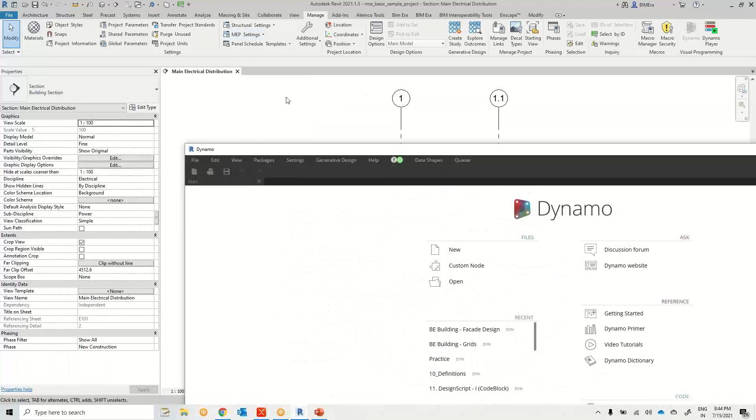Let's say for example you have an interference check in the collaborate tab - can you change this to the manage tab? This is what playing is, using is different, playing is different. You're going to play with the tool using a programming language. So this is a different interface, and this is another interface. This is like an add-in, a lightweight interface add-in, which is inside Dynamo, inside Revit, but it can completely control the application.

I'll explain how it's working, I'll scan it, and I'll simply let you work with them and explain what it would be. So Dynamo is a program, a way to tell Revit exactly what to do. It is saying, 'Mr. Revit, I'm Dynamo and I'm your boss. I can control anything, so you have to do as I instruct here.' That's what it's saying. But how do they communicate?

How do they communicate? For example, if you are in Spain, and you want to communicate with Spanish people but you don't know Spanish, how do you communicate with them? You need a translator. If they want to communicate with you and they don't know English, or Hindi, or Tamil, how do they communicate with you? Again, you need a translator. Well, Dynamo is acting like a translator between two different sets of things. What are these two? I'll explain later.

So visual programming is not new to the industry - it's been around for so long. If I show you, generally we teach kids for free of cost, like what Byju's is doing, like what some other companies are already doing. We teach kids in a batch, two to three very small kids, like fourth standard, fifth standard. We teach them with a very basic thing, like this kind of tool, where there are more similarities between this tool and our Dynamo as well. What is that?

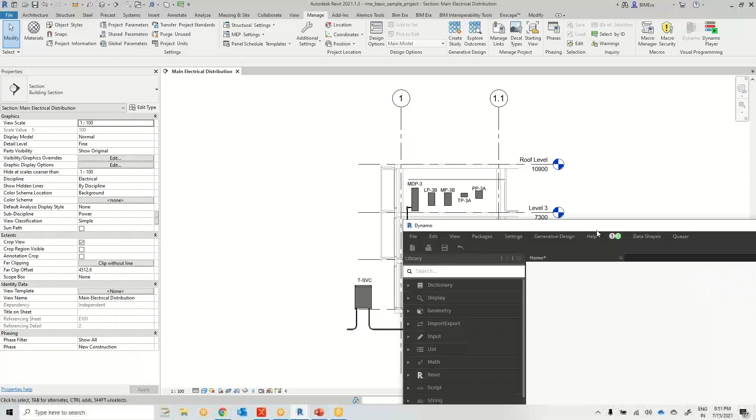Let's say, which model have I just opened? So I'll go with - okay, let's go with this. So electrical equipment - this is an electrical equipment. Let's say I can choose what categories we have here. Categories, in the sense, nothing but the part here. Whenever you select an object, if it's showing something, it's like a category.

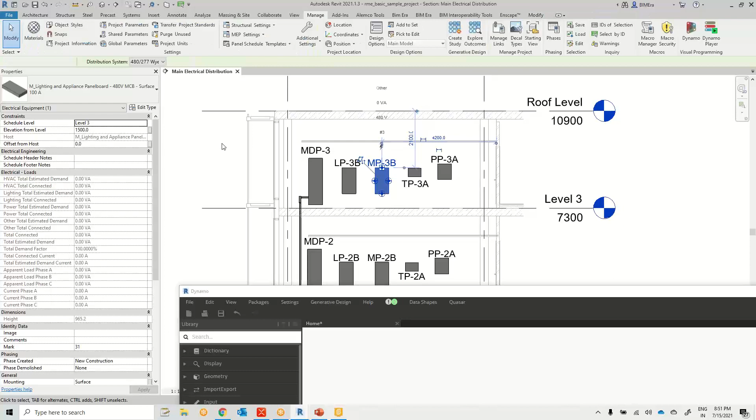So category, when I connect, all elements of a category, I want to get all elements of the particular category. He's going to give us an input as a category.

So I'm connecting this to this. When I connect the node, it is in a hidden line, so it's looking for its active parent. There's a logic behind this, you'll know later. What is the parent and what is a child?

It's mostly a common term for programmers, we also use parent and child. So here category is going to be the parent and this is going to be the child. Whatever the first part is the parent, the second part is the child. Now I want to know who is the father of this child. This is how we can question something with a different sentence.

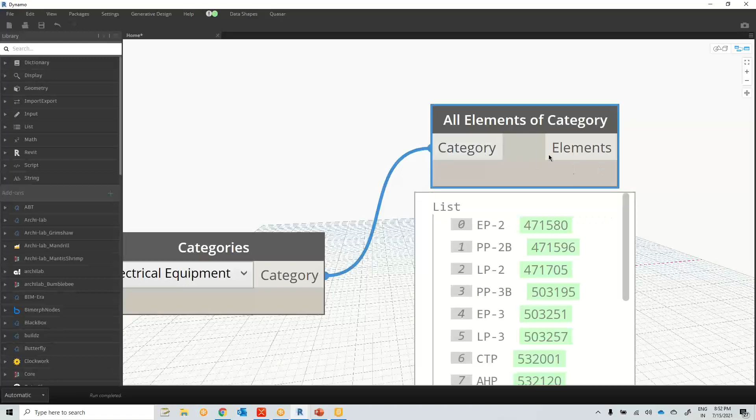When I connect the categories to the category, I can see 29 elements. I got this 29 elements, that is fine. I have a connection.

So when it comes to programming, we have visual programming and we have two kinds of things. One is block based programming, and this is an example of block based programming, and there are a lot of block based programmings.

Trust me, you are not directly entering into programming. You can't pass an SSC without clearing fifth standard, sixth standard. There are certain things you have to master first. Before getting into programming, don't directly play with the programs.

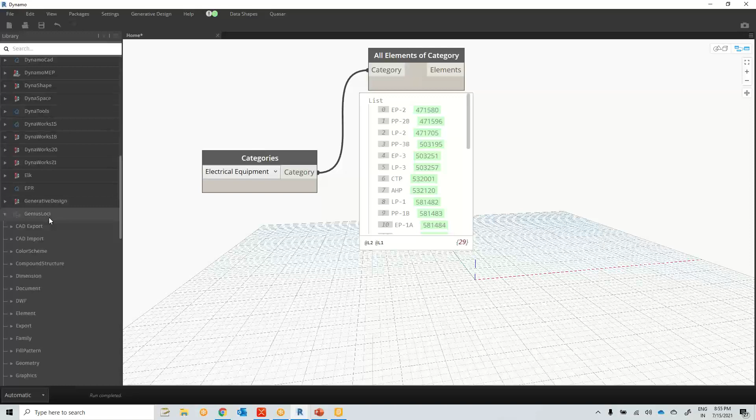When I click on Genius Loci and CAD export, this works in an extreme way. It does a complete automation within, it has some things written itself. When I double click on this, there is Python code again, where somebody has already created a script here, and I should know how to use it.

If you know how to use it, you can play with it. The only thing you have to know is visualizing. That is what we call visual programming.

You're not writing any kind of script here in my course. In this zero to hero module, you are going to learn 80% of Dynamo, and 20% of a concept like design scripting. Design scripting is a different language—not like C, not like C++, not like C sharp, not Python.

That's a different language. It's a combination of some sort of designing and some sort of scripting, so that's why we call it design scripting. That's recently added, from the last 3-4 batches I'm doing it. Most students keep asking, sir, I need this topic, and I can't take personal sessions for everyone. So I decided to add design scripting into it. I'll show you what I'm going to teach you in the entire training program.

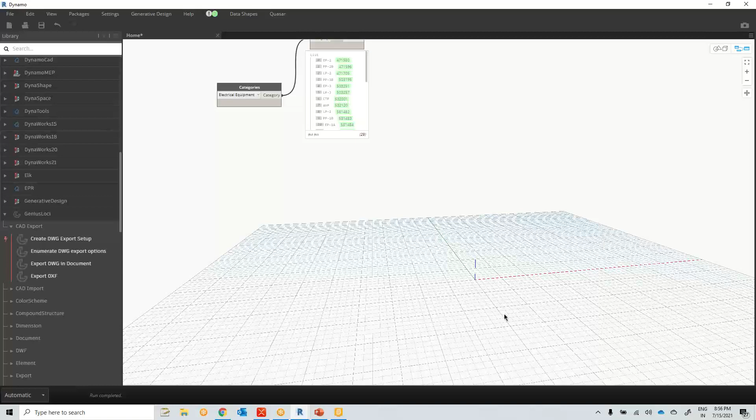So this is block based programming, and we have one more thing, that is flow based programming. What it does is there is data passing from one block to another. So this is a block which consists of A to Z alphabets, and I have some FACP panels, or I have some structural columns. So I have to name each and every structural column as per the grid locations.

Where there is a grid intersection, at that point I have to place one column up to a certain height, and I want to tag it instantly, name it instantly. So this is my intention. So I have data of structural columns, and data of something else, like A1, A2, B1, B2, C1, C3. So this is the data flowing from one to another, and some sort of functionality is happening inside a block.

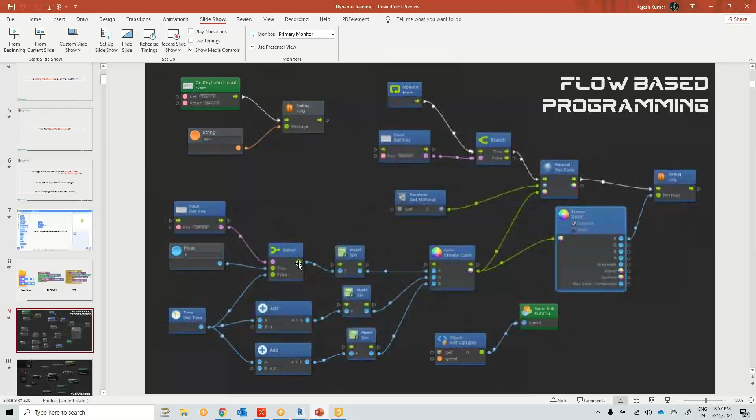So this is a block and somebody has already written some sort of code inside it. Generally we call these code blocks, or nodes. A code block is different, you can write something in it, but still we can call these nodes or code blocks. I don't want to give you the complete introduction, because I can explain these 10 slides for 1.5 hours with very detailed explanations. You don't need to do any R&D even.

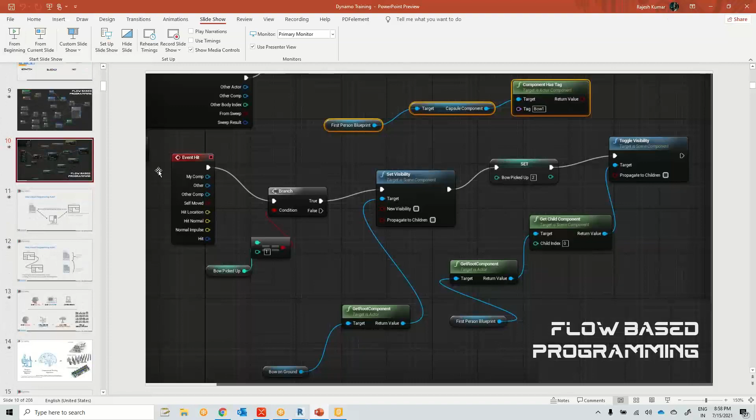We have a lot of visual programming tools in the market, and this is going to be a boom in future. Because if you are from a mechanical, electrical or architectural background, architects and structural persons can easily understand the programming parts, because they keep playing with points, vectors and scalars. So this is how it would be. Well, let's get into the topic. Let me show you.

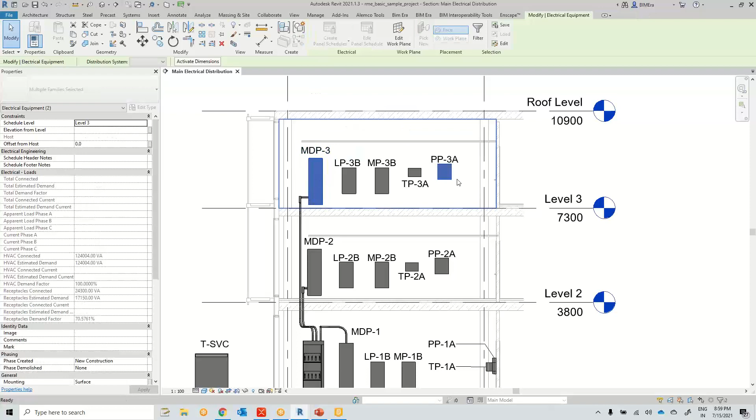So this is Categories and All Elements of Category. Now you can ask me, why did you connect Categories to All Elements of Category? Are you sure I have 29 electrical equipments? Let's select this, click on BX, and the 3D opens, and let's say VG. Turn off all the things except electrical equipment. Click OK, and turn off the section box.

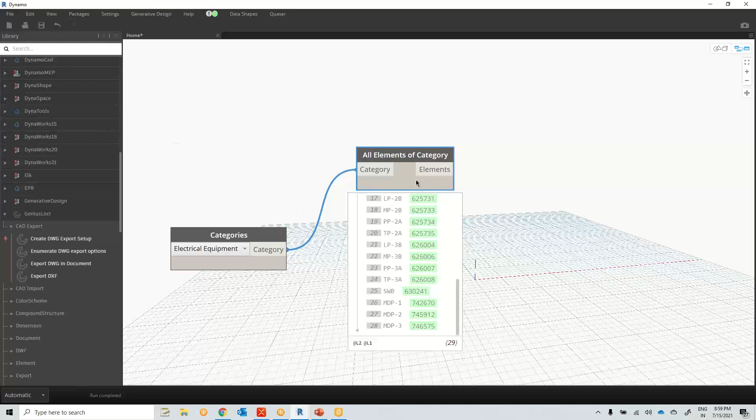When I select all this, it is showing 29 elements. Then it's perfect. I got the 29 elements. Well, this is fine. So how does it know exactly? Do you have any logic behind this? So for example, All Elements at Level.

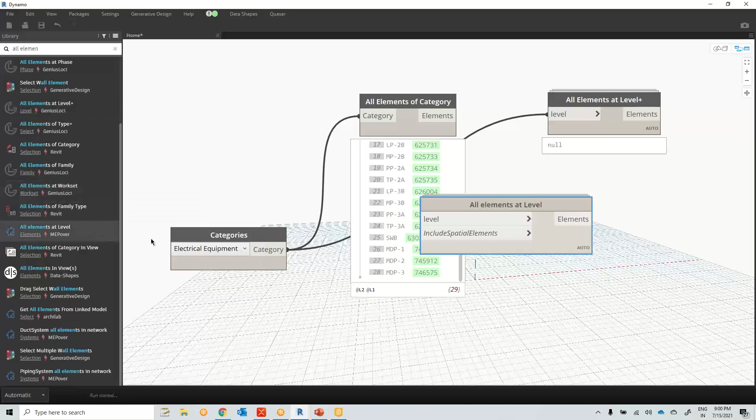I have an electrical equipment category, and I want to see this particular category at a particular level. So when I connect this to this, it is not returning anything. Let me try All Elements at Level. Why is it not working? It is returning an empty list. So All Elements of Category in View, Get All Elements, Select Multiple, All Elements at Level.

When I connect this to this, why are all these not working? Because of logic. The only thing is logic. That's what I'm going to teach you: what you have to exactly do with it, why this is working successfully, and why the rest of them are not working. Let's do some sort of an anatomy. You know what an anatomy is?

I mean, like doing some sort of a surgery and see what is inside a person, see what is inside a frog, see what is inside an insect, see what is inside any kind of living being. Okay, so generally I like to repair things, like if I buy a new toy or a new gadget, I don't sleep until I repair it. So well, we'll do the same thing here.

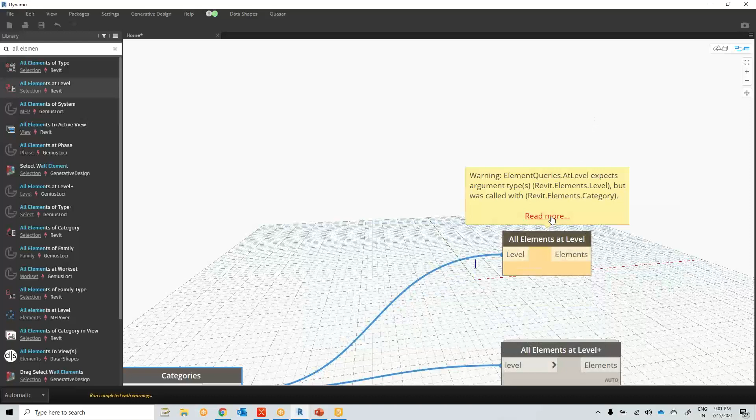Okay, I found some sort of nodes here. So which is the correct node to connect to the connecting node? So I have this, and why should I connect this, and why is it giving you a warning? Let's read the errors. Okay, what is it saying: ElementQueries.AtLevel. Okay, that's a node name that is expecting a level, but you have connected a category. Oh, that is the reason. If you understand the warnings, you can play with any kind of node.

Okay, there is a complete session for errors itself. Because guys, if you really want to understand something, you have to play with troubleshooting. You have to create your own problems, and you have to find the solutions for them. Only then is that called pure R&D, perfect R&D. That's what I did. There were a number of times I've been scolded by my team for disturbing something, but I like it. If somebody's scolding me, I really enjoy it, because that's a challenge to solve something. And I used to come back within 1 hour, 2 hours or a day with a proper solution and say I cleared my problem.

But still, I'm not telling you to do the same on your live models. Just open it in detached mode and play with it. When you're playing in detached mode, it works fine. When you're playing in live mode, of course it can disturb something completely, and it's very hard to even rectify it. But still, the best thing: keep repairing, keep doing some R&D. That's what you guys have to do.

Okay, and you don't need to do that kind of thing. I'm here to teach my 4.5 years of R&D experience in 15 to 20 days. It's very hard to explain, but still I'll try. There are a lot of things. There are around 208 slides, and there is design scripting, one more presentation of around 75 slides. So in total 300 slides, which are very well designed. And I'm going to give you the complete brief on how you create your own custom nodes and how you publish your nodes under your name. So this is up to you to learn.

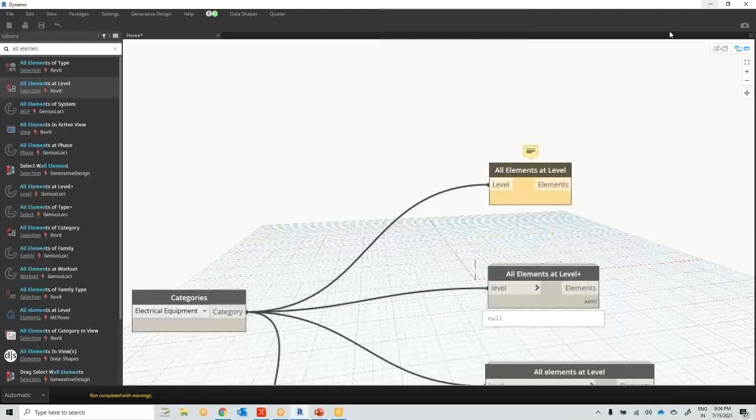Okay, so All Elements at Level, why isn't this working? Let's cut this, and this, and this. Okay, now I just cut each and every node, and now for every node I have two paths. One is before and one is next. The before, the left hand side part, we call the input, and the right hand side part we call the output. Okay, so input and output. The input has to connect from the existing node. There is a logic behind it.

Now let's consider this an input and output. This is an input and output. Assume that is an input and output. Okay, I'm not focusing on the graphics now. I have a very bad mouse.

Okay, well, the first logic that you are going to play with is that the output always matches with an input. If you're going to connect a connecting node, generally we call them connecting nodes, if you want to connect a node with another node, the output of the first node should exactly match the input of the second node. So output and input, output and input. The output is a category and the input is a level. Are those matching? Guys, please unmute your mics and say, are those matching? Output and input?

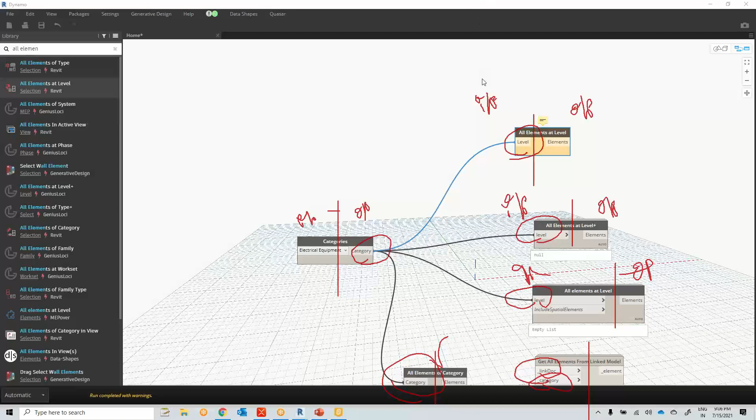Okay, well, the same logic applies here. So output and input must match. This is the first tip that you have to remember. Okay, well, let me clear all the drawings again. Well, all elements at level.

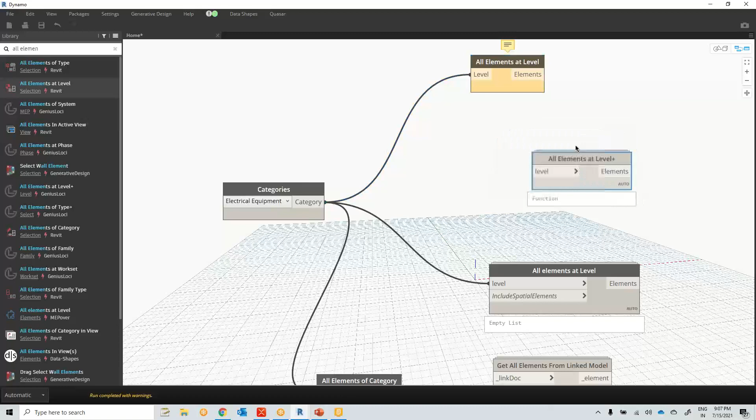Okay, if you know a node, it's very easy to find a connecting node based on the first logic. What about in the reverse case? In the reverse engineering method, you know all elements are at level. You have a node which is all elements at level, so you visualize yourself: if I connect a level, it will connect all the elements from that particular level. What would be the connecting node of it? Then you have to start finding from the input.

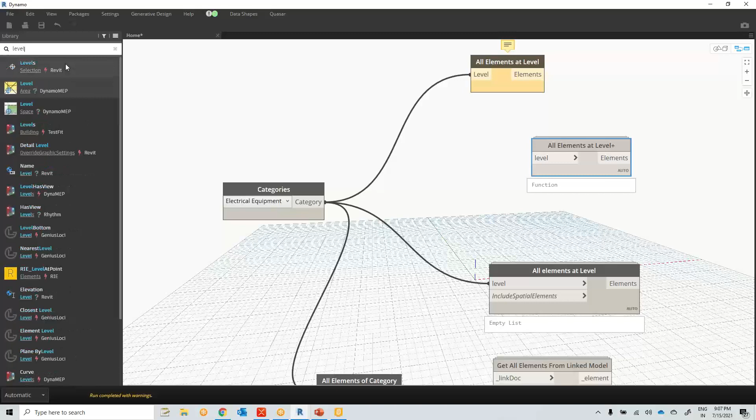What is the input name? So if it is saying level, let's type level. I'll see levels. Level dot area. This is also giving you the level dot space. This is a space, so keep this aside for now. Levels building, there are no levels. Name level, it is a different thing again. So I found a few things. I can't explain all those things in this demo.

So what is a level here? For example, if I choose level 1 here and connect this to this, it's giving like 4065 elements in level 1. If I go and change this to level 2, it's showing 2456 elements in level 2. There are zones, model curves, spaces, some sort of 600 by 600, 400 by 450, whatever it is.

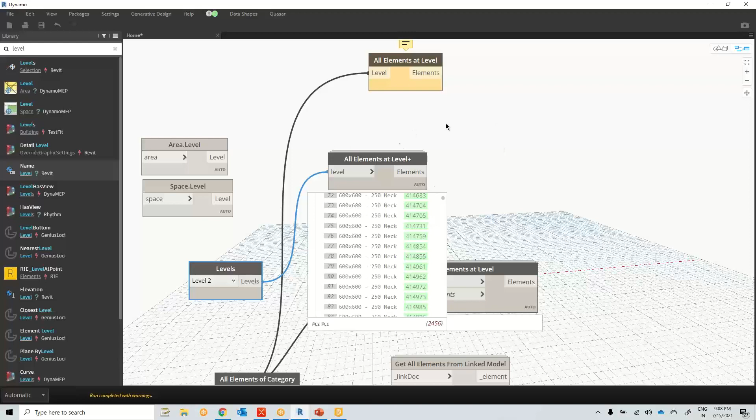Now I want to know what these elements actually are. I successfully connected this and got a node. Now I want to know the connecting node of this. I want to know the name of each and every level, I'm sorry, each and every element. How do you do that? How do you find it exactly?

Okay, well, this is for you only. I have an element with me. There is a technique to call any set of a node. What is in your hand right now? Put a dot, and what are you expecting to see?

Let me change this, select this fixed width. Let's change this to 500. Okay, well, so what is in your hand and what are you expecting to see? Well, what is in my hand?

I have an element with me and I want to see the name of it, and I want to see the ID of it. I want to see the location of it. I want to know what type of an element it is, and I want to see what is the category of it. Okay, now the third thing is, let's keep this set. Element. What is in your hand? It's an element.

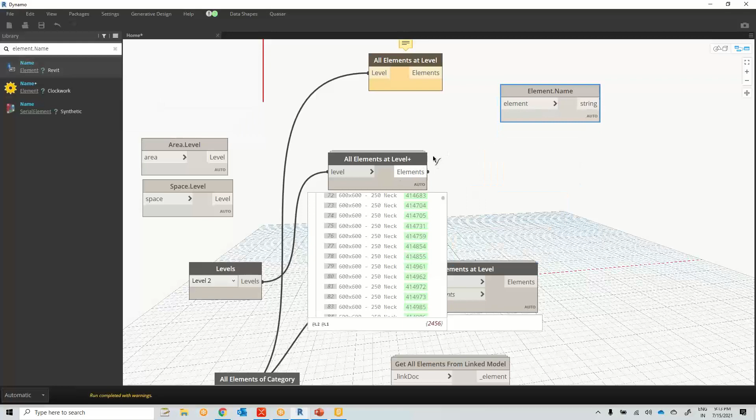Okay, so element dot name. I want to get the name of it. Element dot name. I got this element dot name and I connect this to this. Successfully I got it. Let me delete these 2 nodes aside. Element dot name. I got the names of these elements.

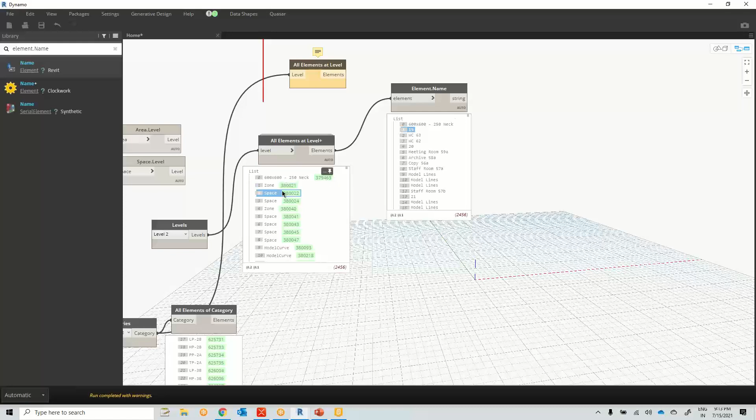So it's 600 into 600, 250 neck, 19. What is this 19? It's a zone name. It's 19, and a space name like WC63. WC means water closet, 63, and space name is like WC62, and zone is like 20. This is how the name is.

Now I want to get the category of it, what category it actually is. So let's say element dot category. Can I get a category here? Category plus. Why did I take this very easily? Because I know those two. Because if I use this, it's expecting an element, and when I connect the element to this, it will give you a warning.

I know this very familiarly because I've been playing with it for 4.5 years, so I know which it should be. I can't show you all those things at the same time. You'll come to know from the 3rd or 4th day itself, you'll be telling me, no sir, you shouldn't use that. You'll come to know with 8 to 10 hours of training for sure.

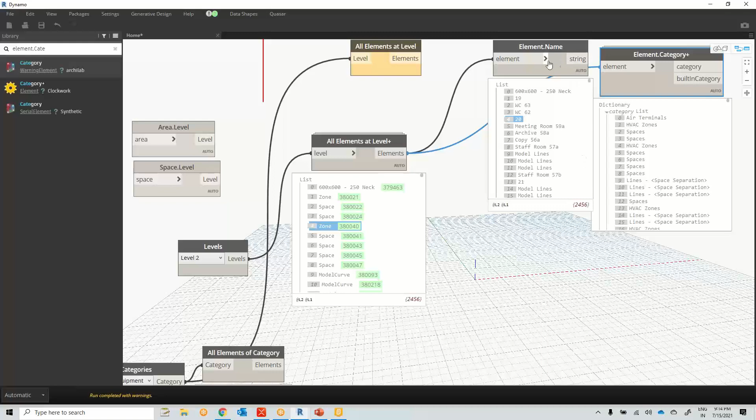So when I connect this to this, it is giving how many items I have? 2456. So I have 2456, and if I use a watch node here and connect the category to it, it is saying 2456. Let's bring this aside. I'll use this too, so I'll keep this aside. Now let me list it, perfect.

Now this one is an air terminal, the second one is an HVAC zone, the third one is a space, the fourth one is a space, the fifth one is spaces again. All these are spaces, and these are lines. If you go to the last one, 2451, it's model lines. So this is how you can easily find the category of it.

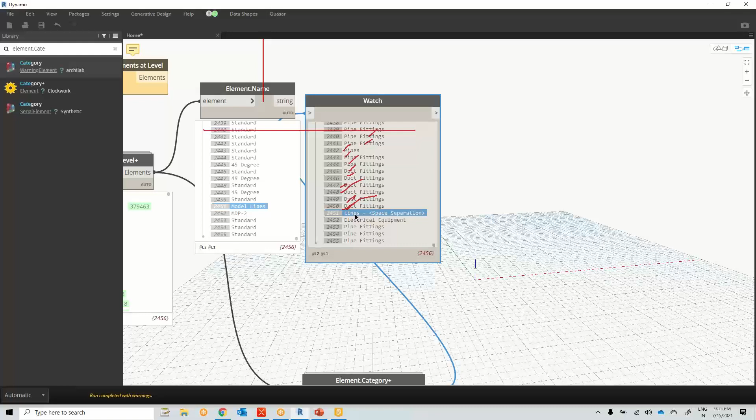Okay, now this is how it actually works. You have two different outputs. You could have a number of outputs. You could have a number of inputs even. So based on the number of inputs, you've been playing with different methods. Okay, so this is element dot category.

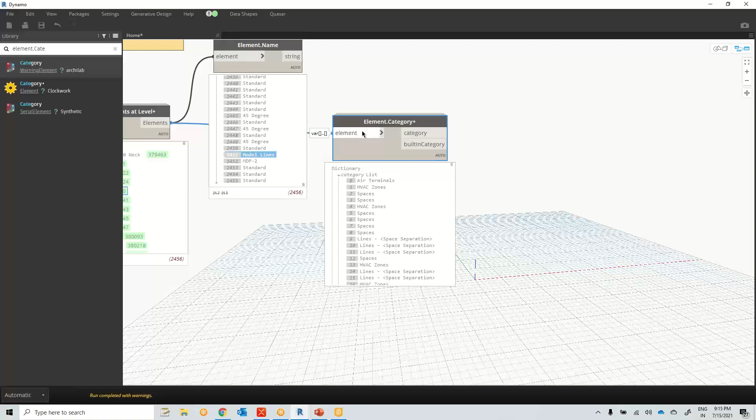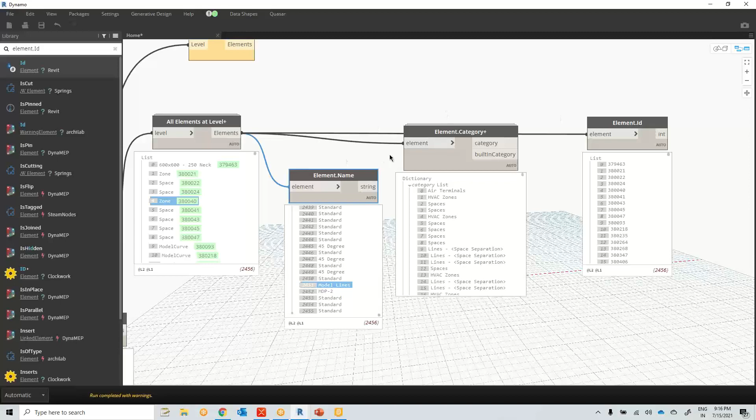If I want to get element.id for each of these elements, when I connect these elements, if you understand the basic logic here, for all these three nodes the inputs are elements. Okay, let's go with another way. I want to know the parameters of these elements.

I want to know the parameters of elements. We have 2456 elements. I don't want to play with all of them, I want to play with only the first element, because it'll take a long time to load it. So let's just get the first one.

It could be anything, even if I type bimera that's fine. Let's say bimera. When I open this and want to get the zero value, what is the element inside the zero value? So I'll type 0 and close it. Now when I connect this to this, it will get the zero value.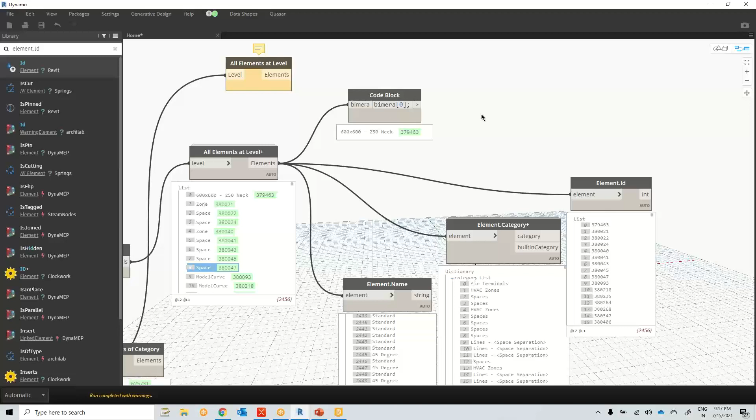Now if I say to go and get the eighth one, so when I type 8 here, it will be getting the eighth element, 380047. You understand? This is called design scripting. You will be knowing it later. We call this an indexing method from programming terminology.

Now I have an element here. How do you know that is an element? Here you can easily say that's an element because it is written over there, but sometimes nothing is written. It's like an element, how do you come to know that?

Well, there is a very friendly node, it's like Object.Type. When I connect this to this, it is saying that's a family instance and it's an element. You'll be coming to know the data types by the second day itself.

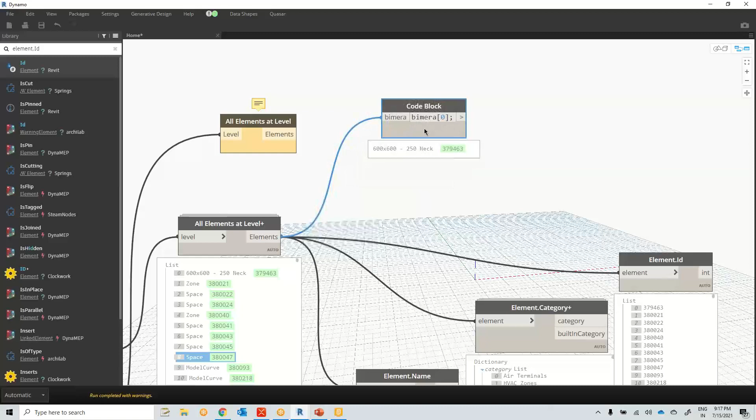So this is the first one, element, and I want to get the parameters of it. Now element.parameters, when I connect this, 34 parameters I have for this, and the categories are air terminals. What are these 34 parameters?

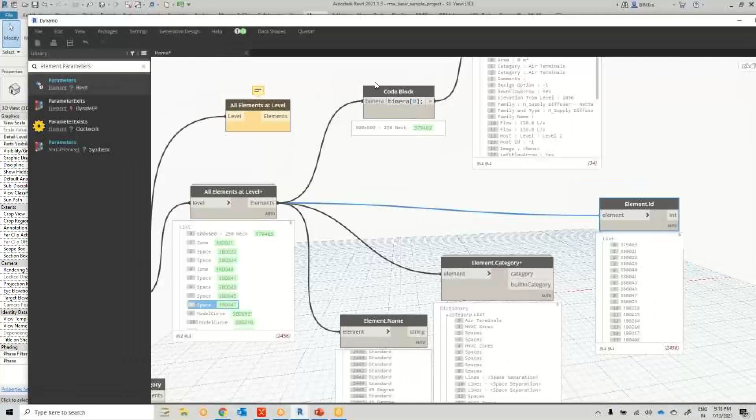Well, there is a logic. Where how can I get element.id where we don't have any parameter called id here? We don't have any parameter called id, but how can I get the id parameter here? There are a lot actually. Let's play with element.id where I don't have any element.id parameter here even. But how can I get that easily?

Okay, this is the properties palette what we see in Revit. It's nothing but even 10% of the actual parameters we have in Revit. There are a lot, there are a lot.

Let's say when you export a model into IFC, you can see different parameters, you can see a different set of parameters. One second, guys. You can see a different set of parameters. When you export this model into FBX,

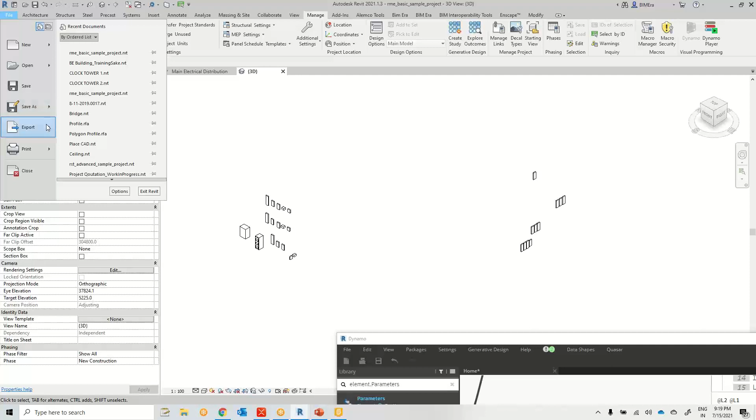you see a different set of parameters. When you export this into DWF or DWFX, you will see different kinds of parameters again. Well, GBXML, you can see a different kind of parameters, there are a lot. ODBC database - what is this ODBC database? You'll get everything. So there are different sets of parameters, but where are they hidden? Is there any specific tool here?

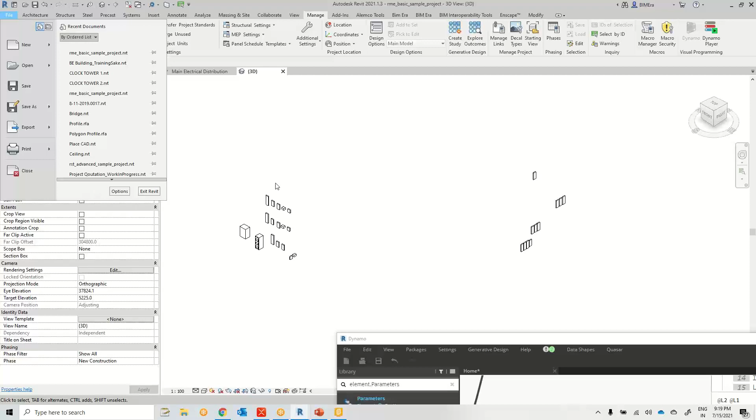Yes, that's called a tool, let me show you. For example, let's go and select any one of the elements here, where there's a tool called Revit Lookup. You can see from where we are extracting this ID information - there is an element ID, element.id, there is a name, element.name, there are parameters, element.parameters, and element.pinned, whether I would like to check whether an element is pinned.

Now Dynamo is reading the parameters from a different set of tools, where if you count these parameters, it would be like 34, and if you count these, it would be like 304, sometimes more. For example, when I click on the parameters again, we can see only one value which is inside a parameter, like total connected, the value which is 151984.66, where you can see only one value, but the rest of the 99% of values, what is this total connected?

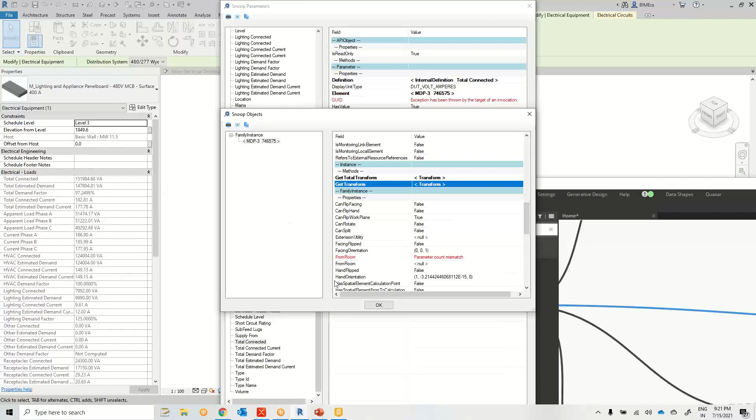Where is the total connected? PQRST. Okay, total connected, where we can see only this value, 151985, but rest of the parameters we have, and within that parameter again we have some set of parameters, and again within that we have some set of parameters, where one value is out of the entire thing, and the rest of the elements you can't see until unless you become a programmer.

Until unless you become a programmer. That's why we are going to explore everything in our training program.

Okay, so this is not rocket science, guys. It's very easy. There are some set of files. I'll just open the recent Dynamo training curriculum. If you see the document which I've already shared you, okay, that is this. These are the 10 key concepts. If you master these 10 key concepts, you can play with any kind of tool.

If you're a Civil 3D person, or a structural person using Robot Structural Analysis, you can apply the same concepts, the same methodology, the same terminology in all the visual programming applications. Even if you're an architect, if you want to play with Grasshopper, you can apply the same methodology. I even added some sort of Grasshopper things here. So the skeleton is different, the interface is different, but the common logic and concepts are almost similar in all visual programming.

Where you don't have design scripting in Grasshopper, you have design scripting here. That's it, nothing else. Where you use Python, we use Python here. Where there's IronPython, we also use IronPython here. The only difference is that's Rhino and this is Revit, nothing else. Where there's Civil 3D and where there's Revit here. That's it. If you learn this Dynamo...

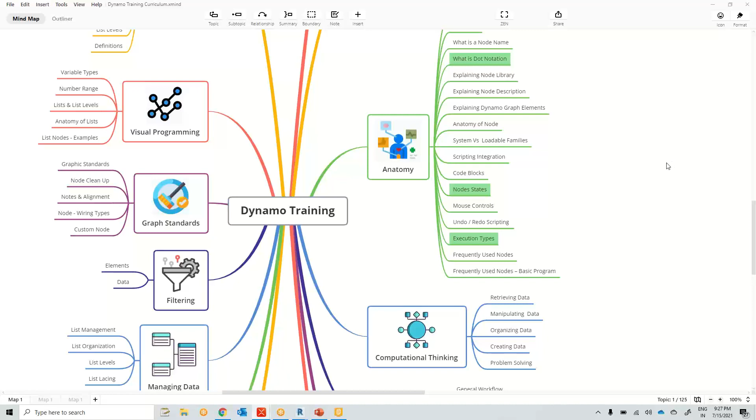Okay, where there is, you can't fit any additional thread into this needle. This is how the computational thinking, the user interface works, and you'll be getting an Autodesk authorized certificate. It's not from Autodesk directly, because even Autodesk isn't providing certificates for Dynamo, so we give you an Autodesk authorized training center certificate. Once they release a Dynamo certificate, I'll be very happy to provide you certificates from Autodesk, even if it's worth bearing the cost, I'll provide it for sure.

That's my promise. Second thing is, if you don't have time to practice, you can join any other batch after 6 months or after 1 year without paying again. This is an added advantage for you, and you'll be getting recorded sessions if you miss a class. You can join 15 minutes before, and I'll explain where you missed the logic or if you haven't understood something, I'll be very flexible in teaching.

Our training program will start at 8:30 daily, Indian timing. If you join at 8:15, I'll be there in the meeting room. You can come and join, and ask whatever you want. This is how it would be.

Well, graph standards and filtering. What do you mean by filtering? For example, if you have 10,000 elements, how do you play with only some set, like 10 elements or just 2 elements? How do you find exactly the elements which are not hosted? How do you rotate all the elements as one thing? How do you create a bridge within a couple of seconds?

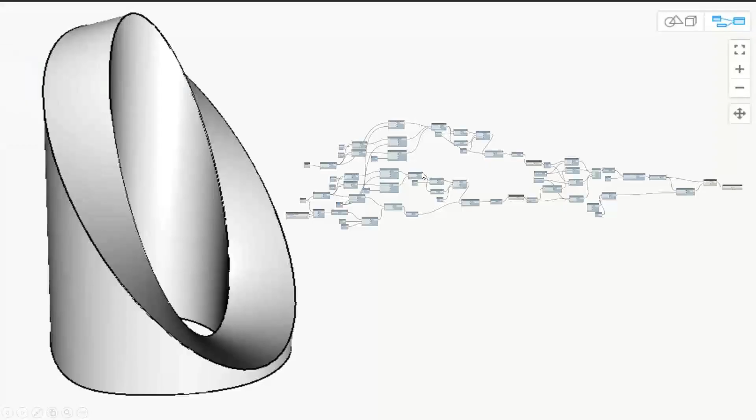Dynamo geometry. Oh, this is not the one. Okay, well, that's fine. So you can create these kinds of structures with the help of Dynamo. Your team can design these kinds of structures, and the base of this is the concepts. For MEP, they don't play with geometry, so they don't need this. But when it comes to architecture and structure, you guys keep playing with geometry things, so you must know all this stuff.

Okay, like how do you exactly turn this entire thing?

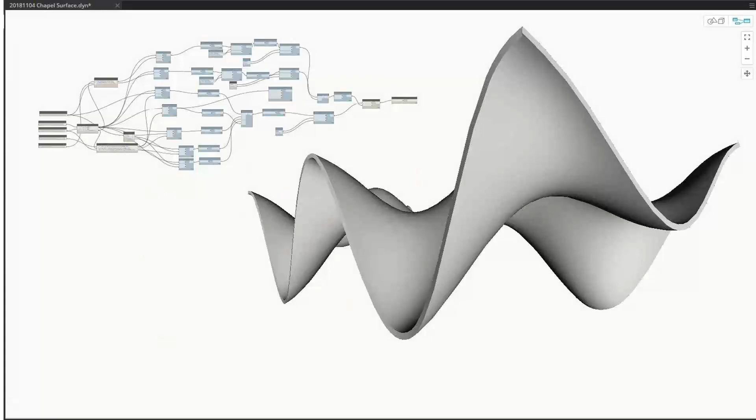How do you create these kind of complex geometries like tunnels or complex buildings, everything like these kind of structures, in like 30 minutes or 45 minutes mostly?

There is a very basic structure to understand. For everything, there is a logic. If you understand the logic, you can play with it. If you don't understand the logic, you can't play. That's the thing.

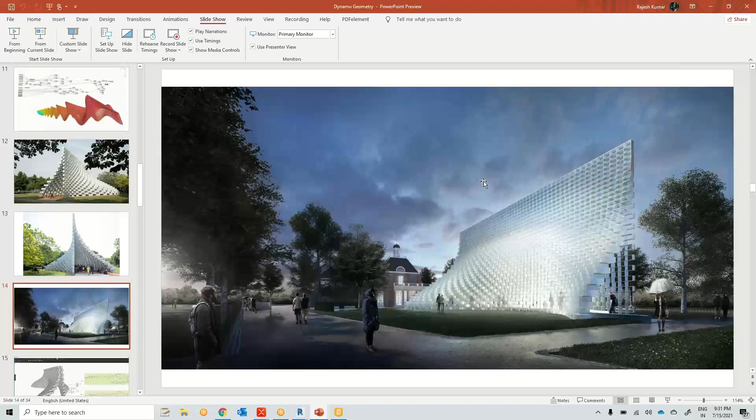When it comes to this course, I have designed like 200 slides for the Dynamo geometry as well. We cannot cover all the topics because most candidates I'm getting are MEP candidates. So I'll be focusing on MEP, architecture and structural, on these 10 key concepts. For MEP candidates, you're not going to play with any Dynamo geometry, so you don't need to bother about it. If you want to be a master in architecture also, you have to do the architecture programming course as well.

And the design scripting is an additional juice for you. If you go and ask a 1.5 year or 2 years experienced Dynamo candidate to do something in design scripting, he can't do it. He'll ask, what is design scripting? He knows design scripting exists, but he can't write something very quickly.

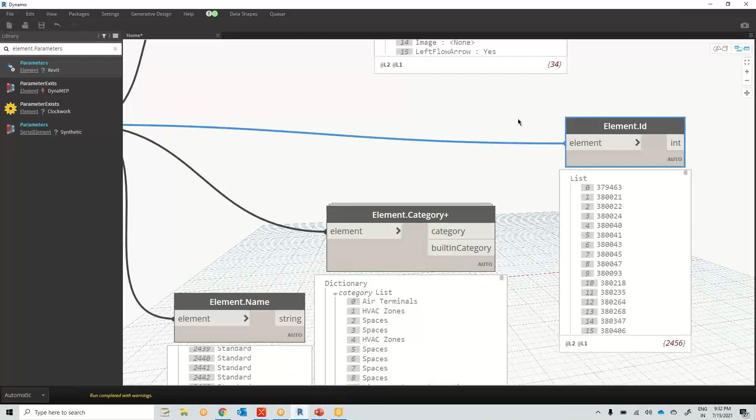For example, let me show you what design scripting is. I want to get the name and I want to filter some sort of elements. So how do I do that?

For example, let's say, let me delete all this. Let me delete all. Oh, I'm sorry. Let me delete all this.

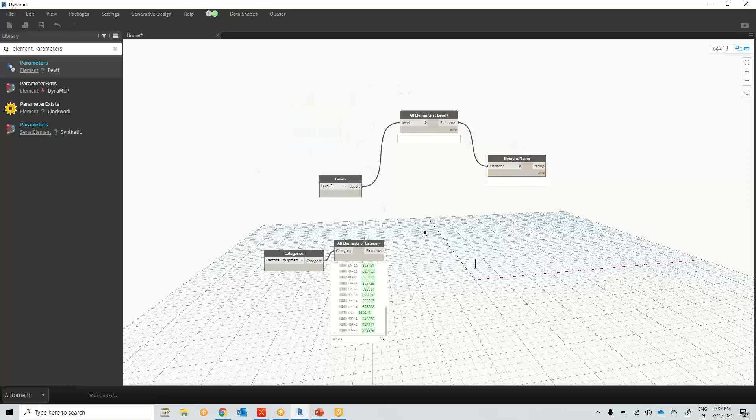I have like 2,456 elements. Now I want to get only the ones which contain 600 into 600, 250 neck. I want to see only the things which are a 600 into 600 neck itself.

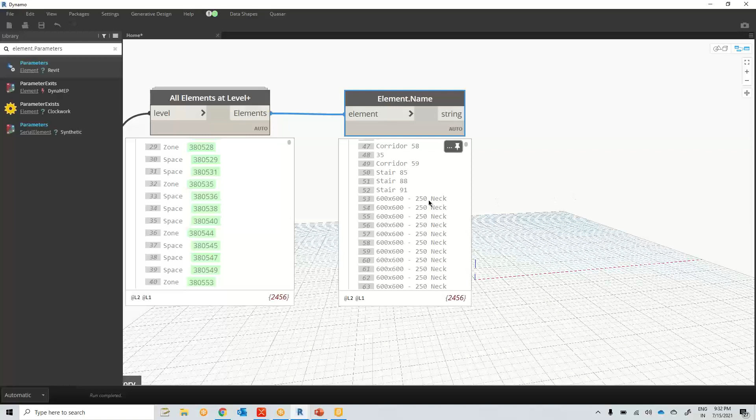So what I do is I'll just use a method, a methodology here, like filtering. So what I explained you now is like filtering. So how do you filter it?

I use a different boolean operator like 'contains' - string dot contains. Why do you have to use string dot contains here? Because I'm getting a string as an output, so I have to connect this to the string itself. So string dot contains - now it will check, does it contain 600 into 600 in it?

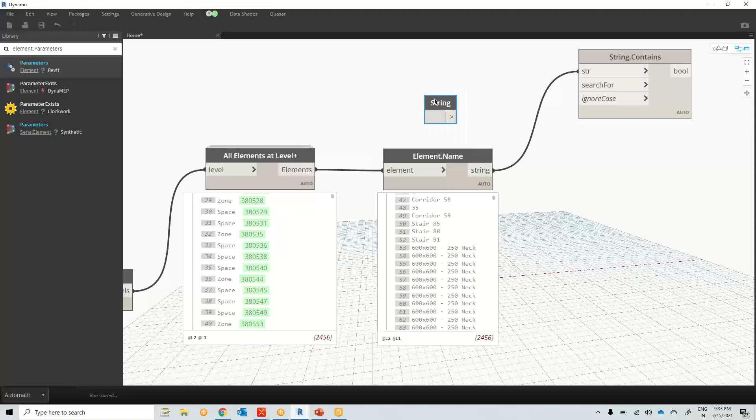Now what is it going to search for? It's like a string again. So how do you come to know why I use a string here? You'll be knowing in the second day session.

So 600 x 600, I exactly type like hyphen, space, 250, and neck. Let me check whether it is 600 into 600, hyphen, sorry, space hyphen space 250 space neck. Let me connect this to this. It'll give you

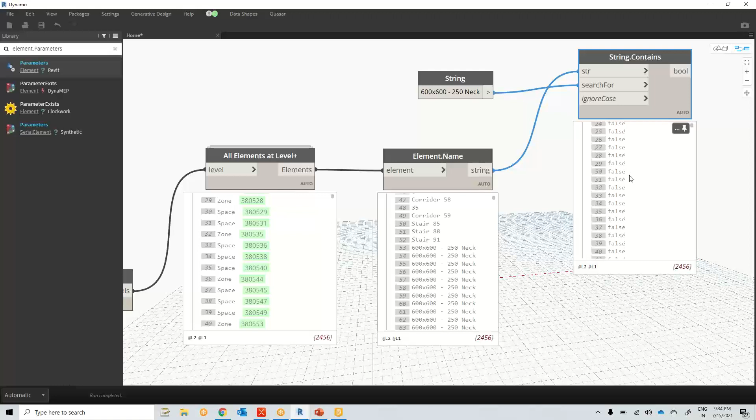the true or false values. That's why we call it boolean operators. So I use the boolean operators where there is a true. If you go and check the 53rd element, the 53rd element is true.

Now I want to see only the true values out of it. How do I do that? This is what is called filtering. So filter by - I want to filter by boolean mask.

So what do you mean? Generally we call this a mask. I'll explain you all the terminology during the time. Boolean - I'll just connect this to this.

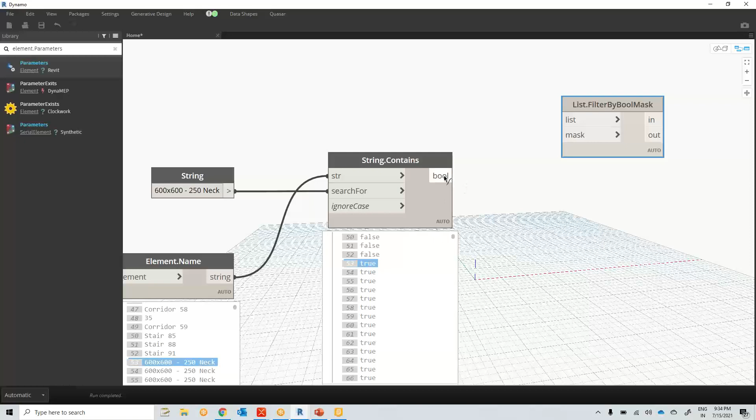And what are the lists you want me to connect? So I connect this to this. Now I got all the elements. See, I got all the elements like 600 into 600 in a couple of seconds.

Why is there an out list? Out list is like returning the false list. So it's a false list, and this is like the in list. We have two things - one is a true list and one is a false list. So in the true list, you can see the 600 into 600.

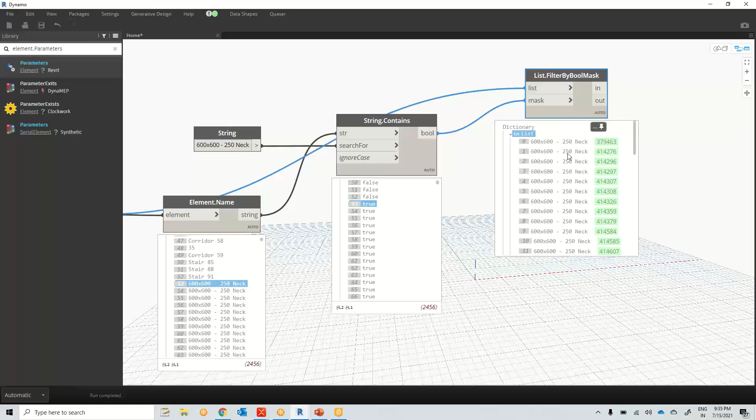Generally, to achieve this output, you have to place 1, 2, 3, 4, 5, 6 - 6 nodes. Is there any simpler method to do this? Yes, you have. Let me show you - this is a code block node. This is where I'm going to teach you up to this extent. So I'll just use e.name.

So element.name, when I connect this to this, I got all the elements here. So you got all the elements easily, very quickly. Now I would like to use which is equal to, okay. So what is that? 600 into 600 space hyphen space 250 NECK. The first one, 600 into 600 space hyphen space 250 NECK.

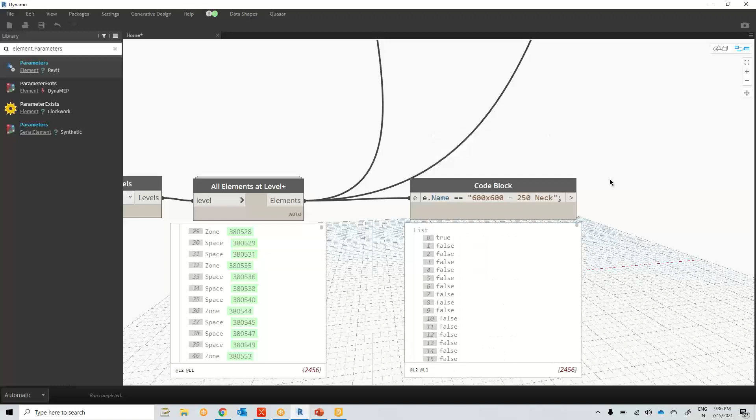Okay, well, oh, I got again the same true or false values. But the same thing, what I want to do is question mark. I'm questioning: if it is true, print that element. If not, print null. Print null values.

See, where there is a true value, it is printing the elements, and the rest of them are like clearing. It's like a null. No, I don't want to see the nulls. I want to see only the elements itself. How do you do that? Well, DSCore. What is DSCore? You will be knowing it later.

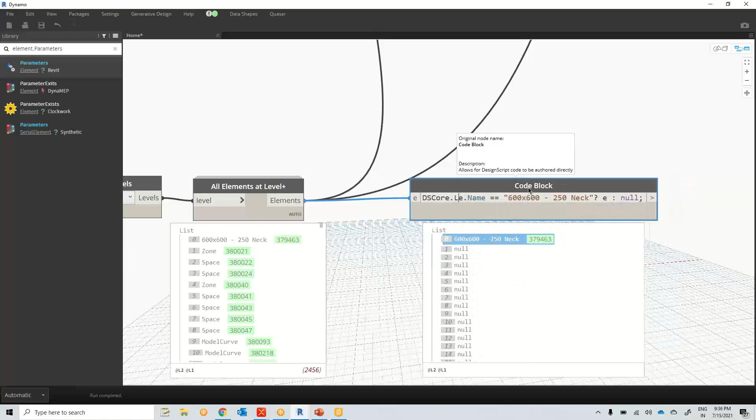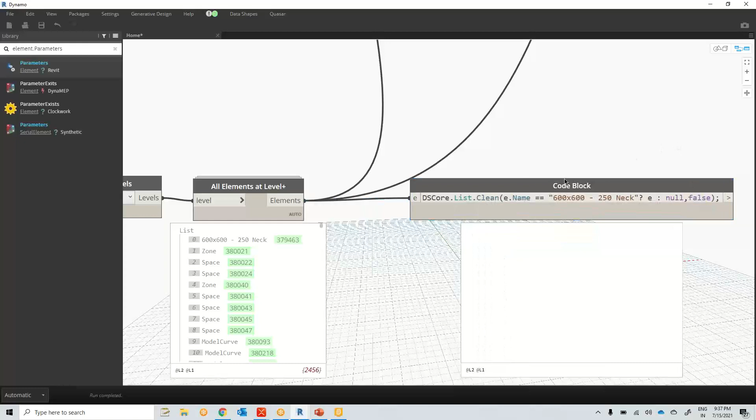DSCore.List.Clean, and when I open this, okay, it is giving some, what do you say exactly, intelligence. Intelligence in the sense which will give you a tip what to do exactly. It's a tip generally. Okay, so it is expecting a list. I connected the list to it, and it is expecting a false, a boolean. So why did I use the false? You'll be knowing during the training. Okay, let's say 49 elements.

Okay, I'm good. So I don't want to play with all this stuff if you are very confident on what you're doing. So this is called design scripting. Design scripting is more sexier than this node based system. Trust me, you'll really enjoy this if you are passionate to become a BIM developer.

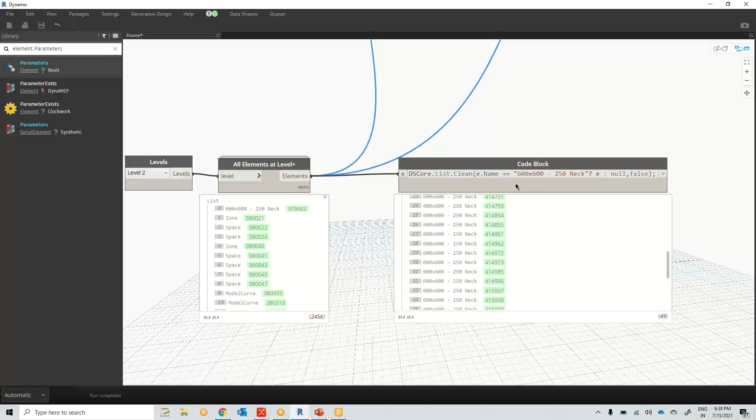Okay, so we have two modules, guys. The first one is zero to hero. The second one is superhero. What do you mean by zero to hero and what do you mean by superhero? Zero to hero will be teaching you 80% of visual programming concepts and 20% of design scripting concepts and some sort of Python as well. Very basic. This is just a basic encouragement for you.

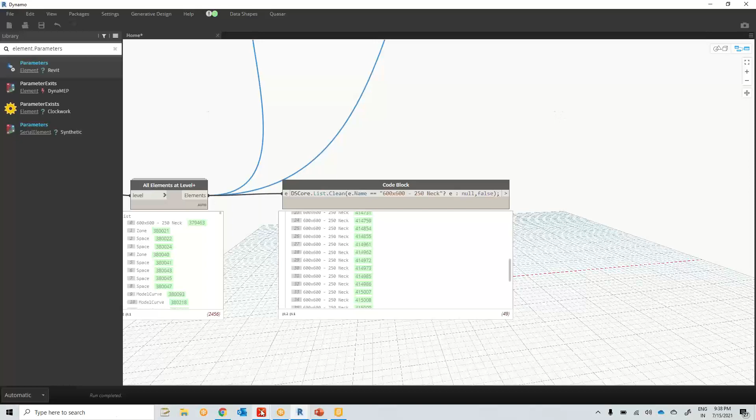Python scripting and Revit API. And this is not the general Python you see outside. This is completely different Python. It's an application Python, we call it IronPython. So if you go and see, this is the entire programming structure for the API, where we start with the same introduction to the bottom line of the course. What is Dynamo, basic concepts of possibilities and Dynamo.

And the prerequisite is you have to be very good in Dynamo, and you must have at least 3 months of good hands-on experience on Dynamo first of all. If not, if you already have a basic programming understanding, then you can go with this course. That's fine. Generally, which is useful, Dynamo or Python or IronPython?

I say Dynamo first, then you have to go with IronPython, because if you don't know where to implement, how to implement, of course you have to implement the same thing in the node of Dynamo again. So you have to understand the Dynamo concepts first. So that is what it would be: introduction to the bottom line of the course, the second day basics of Python, and the third day operations and conditions. No Dynamo, nothing at all.

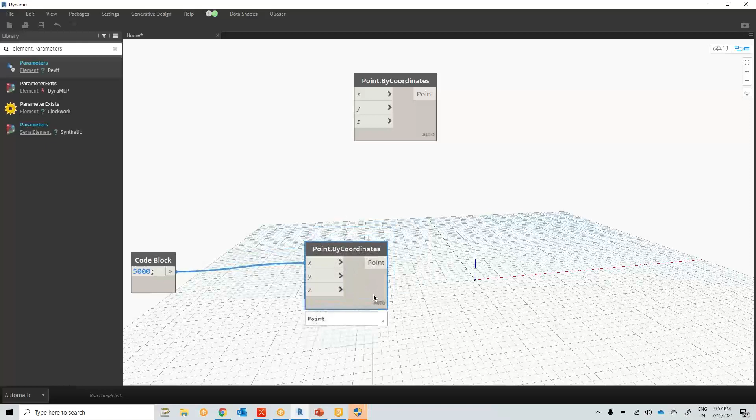Let me explain. It's very easy when it comes to the modeling. For example, if I want to place a point, let's say Point.ByCoordinates. Now I can see a point here. Let's say Ctrl C, Ctrl V, I can see one more point here. And if I play with 5000 in the X direction, I have one more point, and in the geometry preview I can see 2 points here.

Now I want to create a line. For a wall, you need a start point and end point. So Line.ByStartPointEndPoint, you will know why I'm using this later during training time. So it's a line now. Now I want to convert this line. Either you got some lines from AutoCAD, if you want to convert a line into a duct or into a wall, that's it. Wall.By, we have a node with curve and height. It is expecting a curve, and what we are getting is a line.

Generally in the architectural or structural methodology, we call a line a curve. In MEP we don't have that kind of confusion, it's very clear. When it comes to the height, height is a number, so I say height would be 4000. When I connect this, it is expecting a level. I've shown you already how to play with levels here, so level 1. Then wall type, we have a different node for wall types. I'll just go with exterior brick on metal stud wall, and when I connect this, that's it, successfully done.

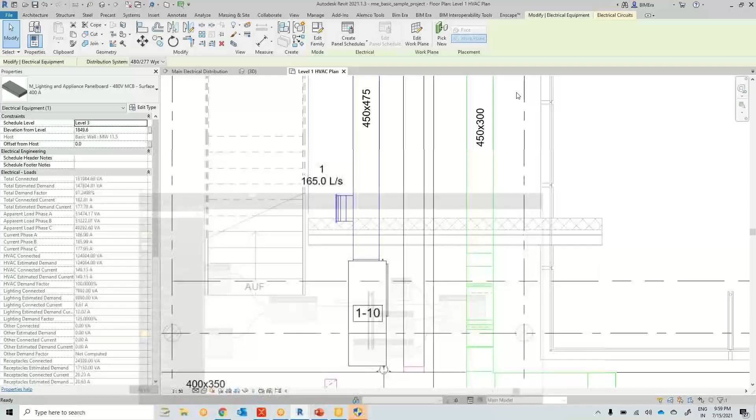It's created a wall, 890965. When I click on the green element, let it open. Where is that wall here? Is this a duct? This is the wall, it seems, an exterior brick on metal stud wall, and the height is 4,000 and the length is 5,000. Good. Now if I want to see the same wall's geometry in Dynamo, Element.Geometry. When I connect this, I got this geometry within Dynamo itself. That's it. Very easy.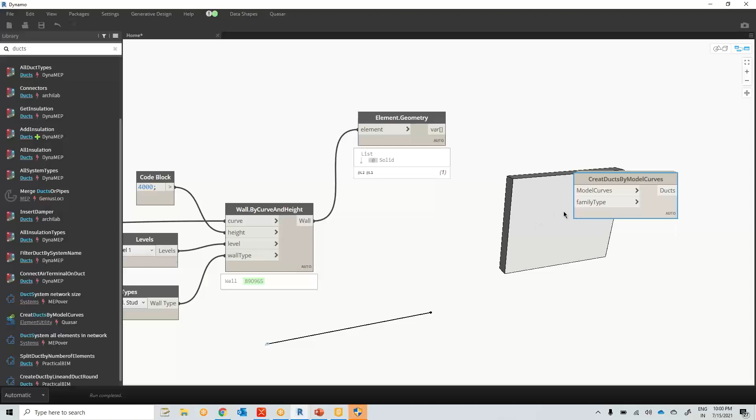If you want to place a duct, create ducts by model curves. When you connect the model curves and the family type, it will convert all the lines or curves into ducts quickly, very easily. Same if you want to create pipes, it's very easy. Or if you want to create a different set of geometry like architectural things, it's very easy. For example, I want to create a circle by center point radius. So there's a circle here.

Okay, I have a circle. Now, where's the center point? There is a basic point, general point here. So if I want to go with a Point.ByCoordinates,

don't think that it's a very tough language. It's very easy if you understand a basic thing: what it is expecting, what you have to connect. That's it. So when I connect this point, it's almost like 0, 0, 0, and the center point by default reads as 0, 0, 0.

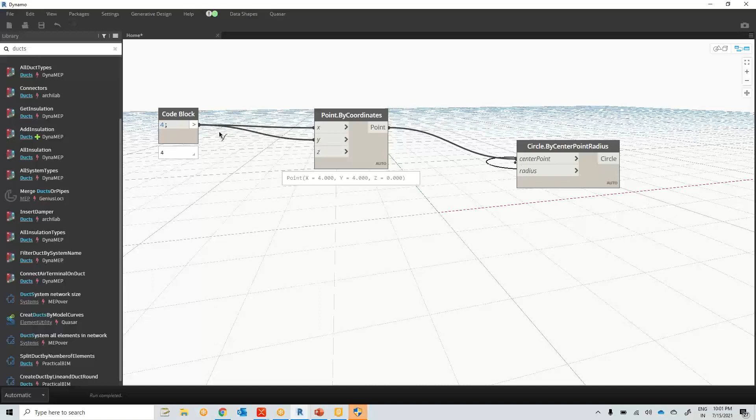So if I use like 4 in the x direction, it's moving to the x. If I use the y direction, it's moving to the other side. If I connect this to the z direction, now it's on top of it. Where is it? Fit to screen when I move this. Now it's here somewhere. Okay.

Now if I want to create one more circle from this, there is a process called translate or offset. So Geometry.Translate. When I connect this to this, the Geometry.Translate, when I switch back.

Okay, let's say I want to go in the z direction. I want to create something in the z direction. It's a number. What is a number? I'll say 10 for now. Okay, connect this to the z direction. Now I can see one more circle over there.

If I want to connect this to this, again what I do is Solid.ByLoft, or like Solid.ByPatch, whatever it is. When I connect this to the cross sections, it will create a solid shape out of it. If you want to play with Solid.Thicken, Surface, Solid.Area, whatever it is.

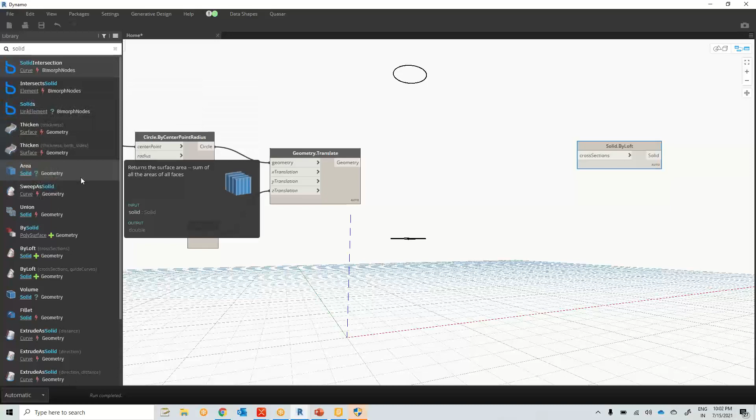So this is a very basic thing, guys. Trust me, even for architecture and structure, you have to go with the key concepts. Without these 10 key concepts, you can't play with even architecture and structure. Okay, that's how it would be. Clear? Anything else? It's very easy.

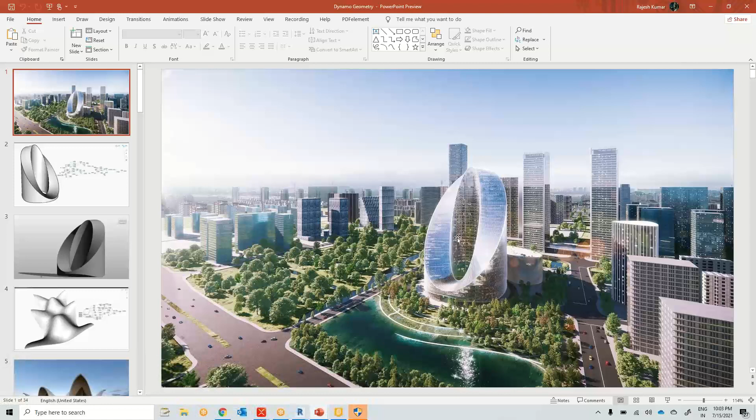Don't consider it's like a very... if I show you this Dynamo geometry, 1 second. You feel like it's the toughest part to design this kind of an OPPO headquarters. Okay, with the

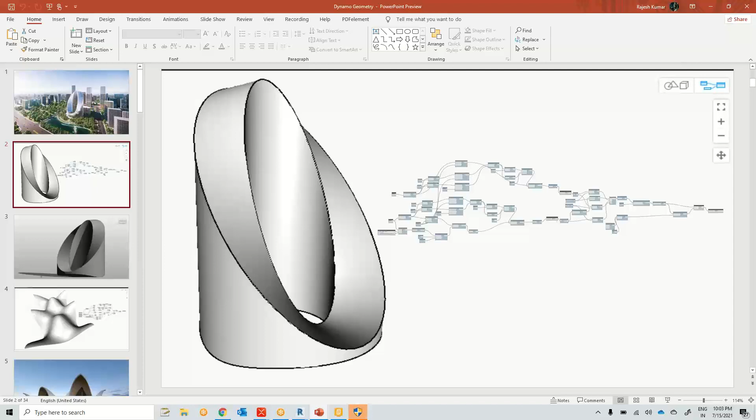Palapan, actually I'm not getting your voice clearly. I have one doubt regarding the wall you created. It shows some categories like exterior wall, something like that. Where does it access those categories from? Is it from Revit? It's from Revit itself.

Okay. For example, if you have any other duplicate types, if I start typing the wall command here, WA, now you can see all the different types here. Do you see this? All these types would be displayed in Dynamo as well, with the help of an API. Can you explain that link, how it accesses that?

Okay, can you sit with me for like the next 6 hours? It takes that much time. Exactly. Well, you will be knowing it, for sure, because there is a process. During the class period, you will teach everything? Everything. Okay, no worries. I want to learn some basics. Okay, sure.

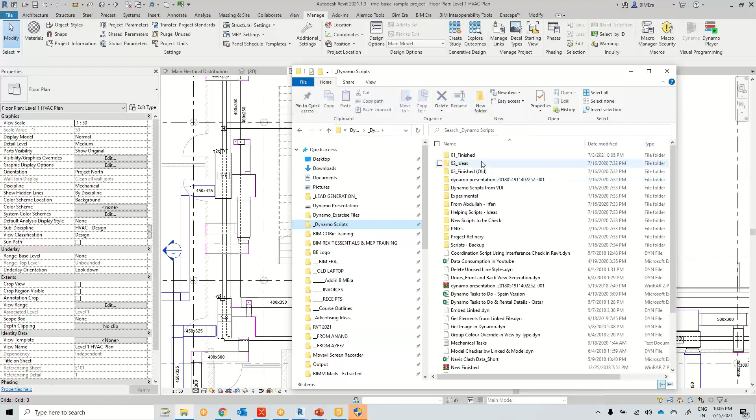I'm not going to teach you all my existing scripts here. If you go and check my scripts, I've done some scripts here. So I'm not going to teach you all the scripts. If you go and check my client scripts, I have a lot of scripts, but I'm not here to explain the scripts. I'm here to explain the logic behind them: how you create your own script by yourself. I'll just focus only on that.

If I teach you the scripts, you will be mastering only those scripts. If I teach you the logic, you can create any number of scripts. Do you understand? So that is how the training would be. No worries. I'll not miss even a single concept

within this training. Even if you guys keep irritating me with some very silly questions, I'm still happy to answer. Just treat me like your brother. Because you're paying me, you have rights to ask. So don't think in any way. You'll be getting the complete knowledge by the end of the session for sure. I'll send you away with a happy face. You'll be very confident by the end of the training. Trust me.

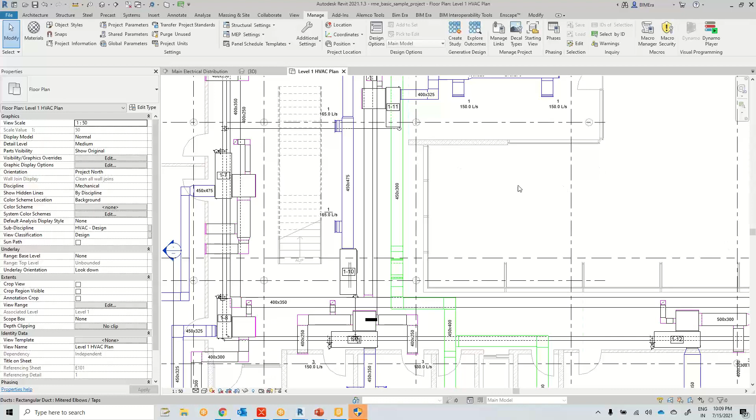Okay, very good question. Let me show you generally how it works. What do you generally do for coordination? You'll open Navisworks, generate the clash report there, copy the element IDs from Navisworks and paste them in Revit, and find the easiest solution. Here it can be automated easily within a couple of seconds. Where there is a clash, it will isolate those elements.

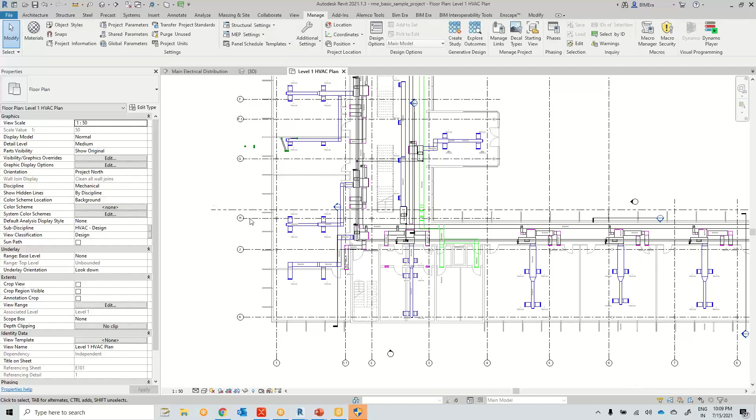Let me go through the last Dynamo batch, the June 2nd batch. Here's the clash detection with linked elements, and a Navisworks clash report example, where you can simply extract the element IDs from the clash report and isolate those elements within Revit, so you can check each of those clashed elements.

The second thing is you can't do some sort of auto-routing with the help of Dynamo, because it needs pure programming. I can't say you can get 100% of the output; there are some limitations. If you can't find the node you're exactly looking for, then you have to create your own. That's where Python helps you. If you can't do it even with Python, that's where C# helps you.

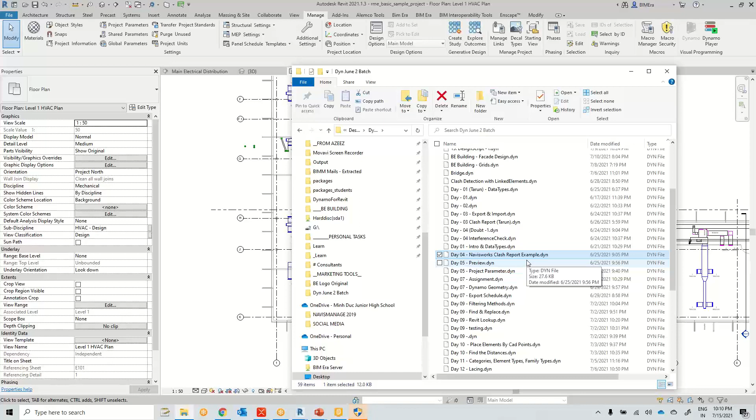Let me explain. Let me show you a slide to make you understand. This one: are you new to programming? Then I'm the one who needs you exactly. If you're completely new to programming, you don't need to write any code. I'll help you by getting someone's nodes, someone's code, and you can play with anything. Second, if you can't find a node, you can code here. Learn the Python language and come to me. This is not general Python, it's a different Python.

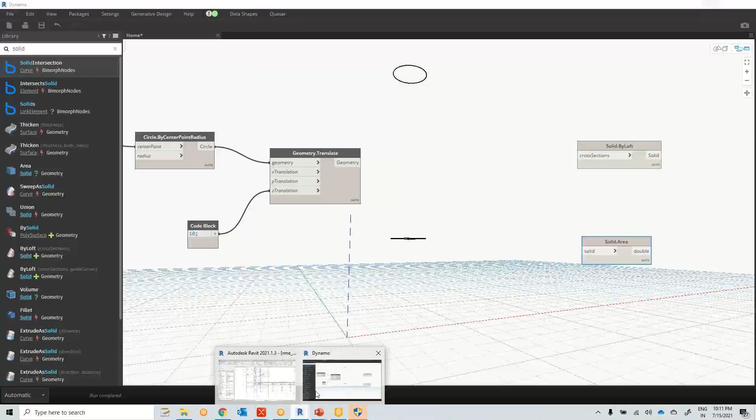There was Revit from 2013 where we have a macro manager, where when I click on a macro manager here, I can write something like an application. When I click on a module, create a module. With C#, if you're confident creating add-ins, you can use C# and name the module like delete duplicates, give a description, click OK.

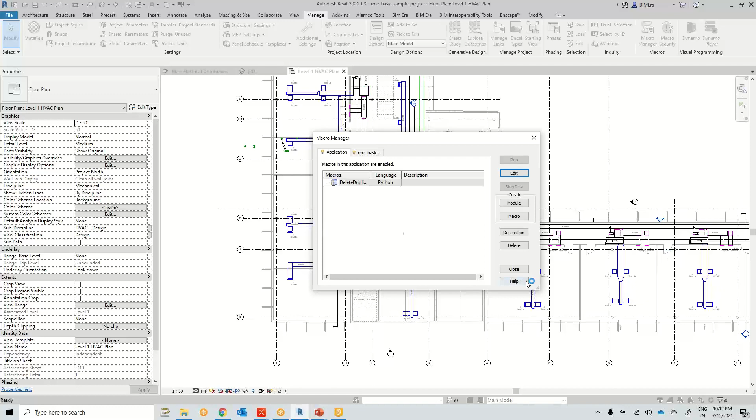And when I run this, it will open a different application that's called SharpDevelop. I hope most of you people have never seen it. It's like SharpDevelop. Okay, it's giving me some... what is this?

Voice is not audible. Are you clear, guys? Okay. Palandapan, you have an issue.

So this is a different application which is hidden in Revit, like before the Dynamo. Dynamo was introduced in 2015, but this macro manager was there in 2011 or 2012, it seems. I don't remember exactly. But this was not that successful, because no one knows about it.

We are BIM modelers, we are not programmers. So that's because it's... I mean, it's not a failure, most developers are already using this. But compared to this, Dynamo is more successful because you can write anything in a couple of seconds. That's the thing. Any other questions?